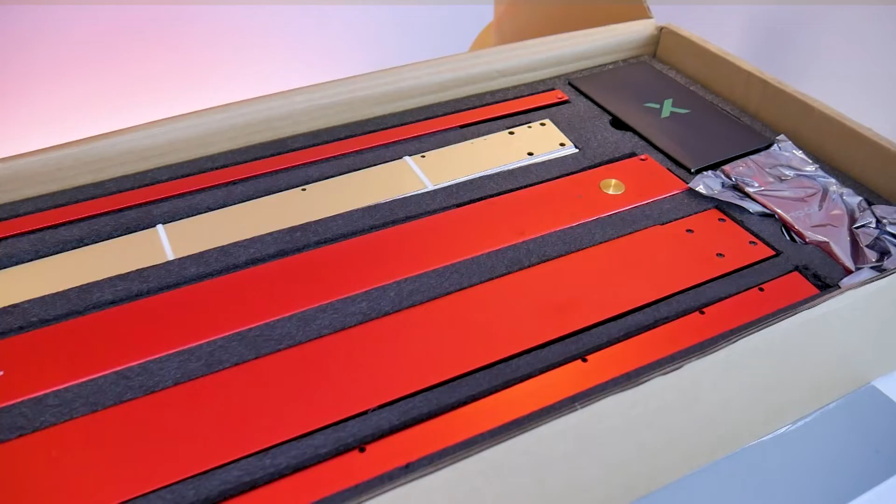Once you pull back that top layer of foam, you reveal these beautifully anodized frame components. Now, I'm definitely a sucker for anodized aluminum, and when I saw this kit in red, it just blew me away. It's absolutely gorgeous. Having worked with a lot of cheap 3D printers and cheap laser cutters, I've definitely gotten used to the very inexpensive aluminum extrusion construction of most of those machines.

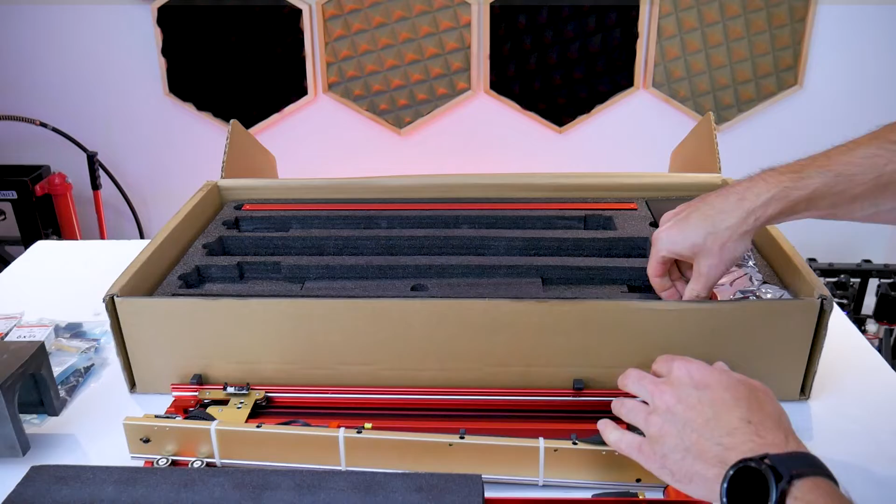I thought it was really nice to see that XTOOL took a different approach with their own custom profiles, and they didn't go for the typical plastic V-wheels on the aforementioned aluminum extrusion. All of the components look and feel really high-end, even down to the safety glasses, which come in a nice hard shell case. I was sent the 10-watt kit, so you just saw me pull out the 10-watt laser module. There's a few other frame components left in the unboxing here, the power supply, and finally a few odds and ends.

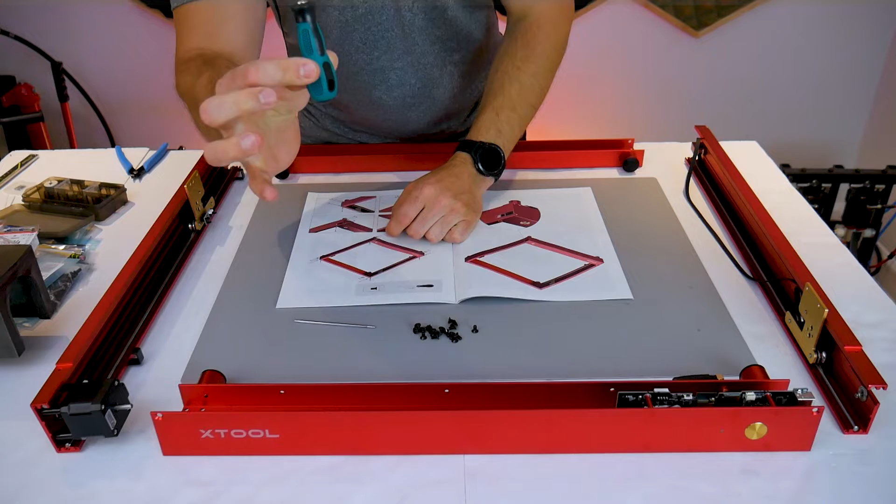Now we can get to the assembly, and although the included instruction manual is pretty good, there are a few small details missing that I'll walk you guys through. And so you can see I've laid out the frame components, and I'm going to be using the included screwdriver along with the M4x16 flathead screws to begin assembling these frame components into a simple box configuration.

Each corner of the frame gets 4 of these M4x16 flathead screws, and I simply just start with the one on top so that I can get all of the corners aligned, and then I'll put in the other 3 screws at each of the 4 corners. When you're finished, each of those 4 corners will look like this with 4 of those flathead screws.

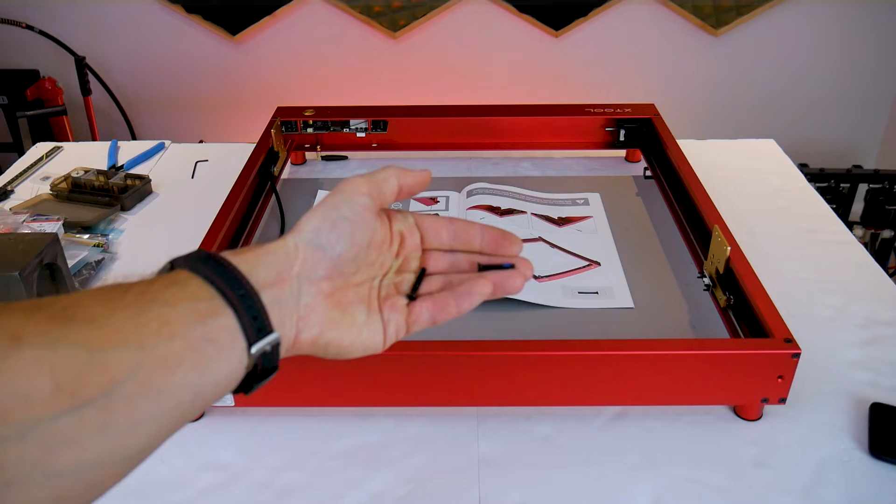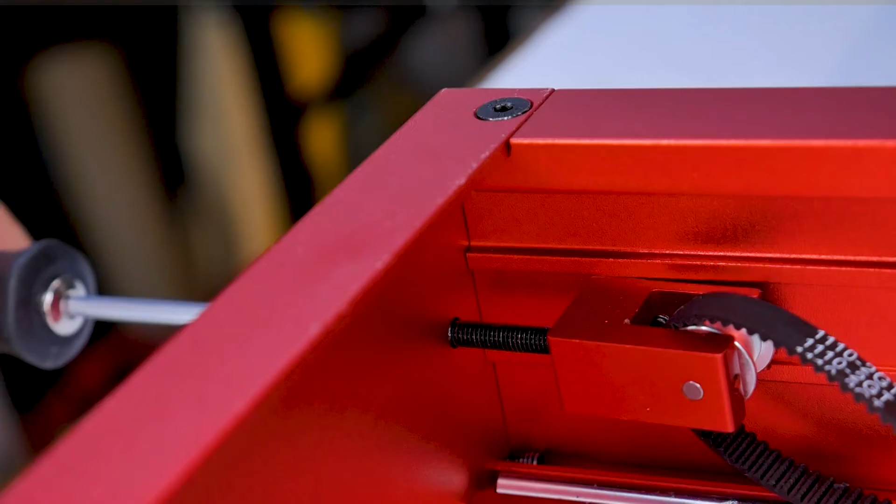Then you'll take 2 of the M4x25 flathead screws, and those will be inserted through the back of the frame, so you can see that I've flipped the machine around, and those will thread into the tensioners for the belts. On one side of the machine, you'll notice that the tensioner is loose, and on the other side of the machine, you'll see that the tensioner and the belt has come pre-tensioned.

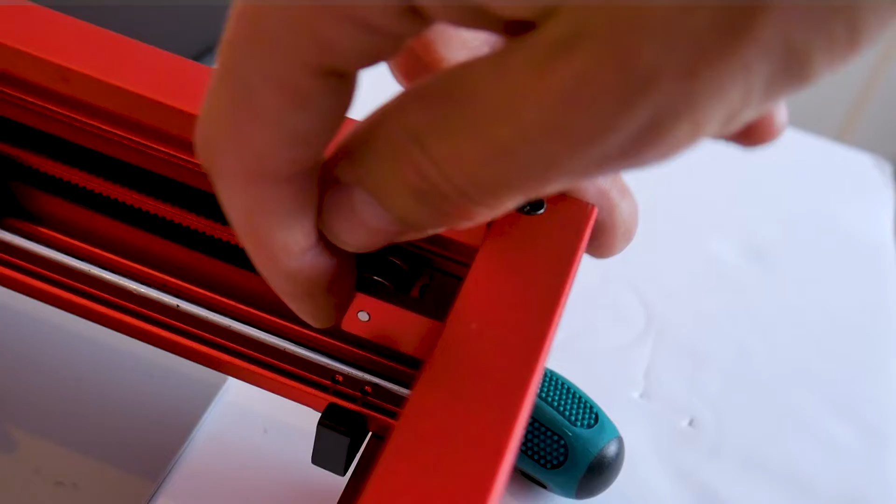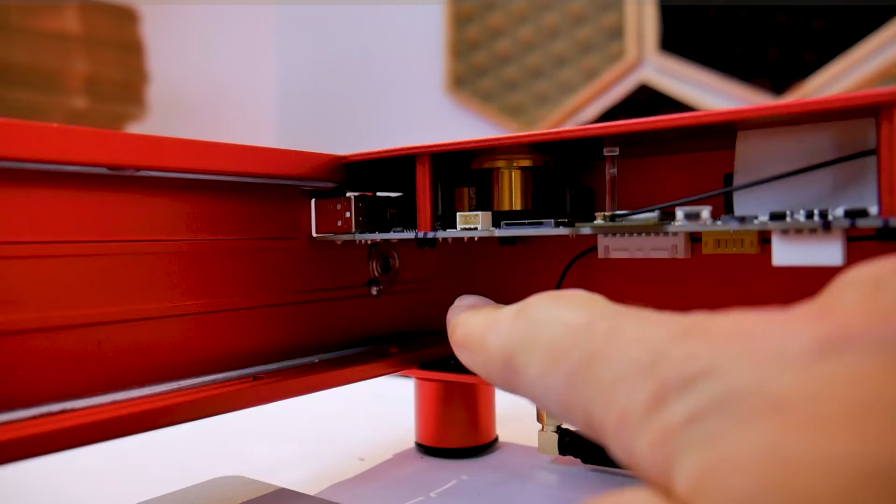Next, we'll install the Y-axis pulley shaft, and the one end of the shaft has the tooth pulley pre-installed, and the other end of the shaft is going to need this split collar. The split section of the collar has 2 unequal length sides, but I'm pretty sure it won't matter which side you align with the motor and the other side with the shaft. The rod will get installed inside of the front frame member, and on the one side under the control board you can see a bearing, and on the other side that is where the Y-axis stepper motor resides.

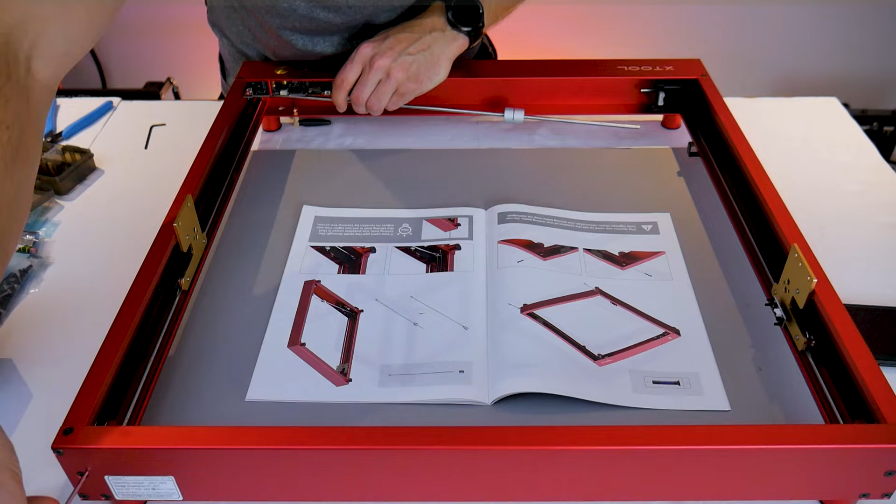You'll need to untangle the untensioned belt until that carriage moves smoothly, and then you can wrap the belt around the tooth section of the pulley and insert the exposed end of the shaft into that bearing underneath the control board. If the belt is too tight, reach around to the back of the machine and loosen off the tensioner. Then you can align the pulley shaft with the stepper motor shaft and slide the collar down so it covers both of them. Do not tighten the screws on the collar just yet, and that's because we need to align the 2 Y-axis carriages.

Now, the instruction manual tells you to move the 2 carriages to the front of the machine to get them aligned and bottom them out on the front frame member. Now, on the left-hand side, it will bottom out, but on the right-hand side, what I found is that the carriage will not bottom out. It actually touches a part of this PCB first. That means that your gantry would be skewed if you did it this way. So instead, we're going to move the 2 to the rear of the machine.

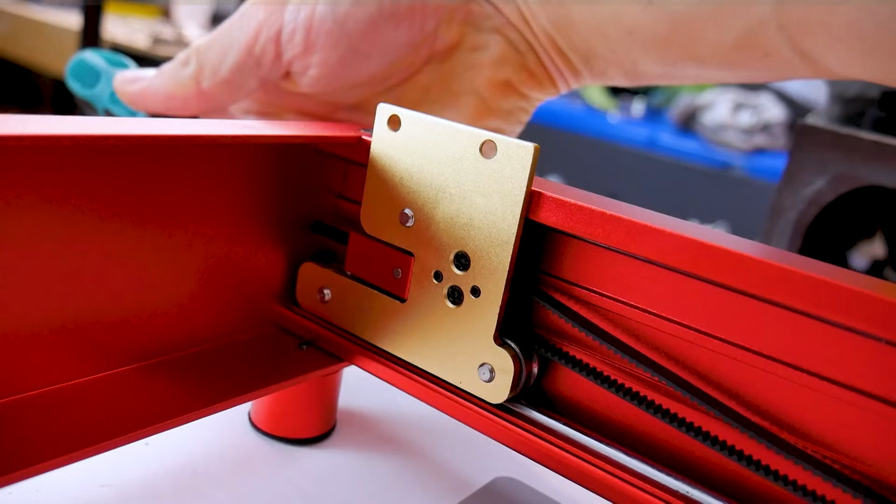And so here you can see that I'm going to get these 2 gold-colored carriages touching the back frame member. On the side with the untensioned belt, you may have to play around a little bit with the belt tensioner to get that carriage to completely bottom out on the back of the frame. Next, make sure the pulley and the shaft are pushed all the way over to the side of the machine with the bearing, and that's going to make sure your belt is aligned.

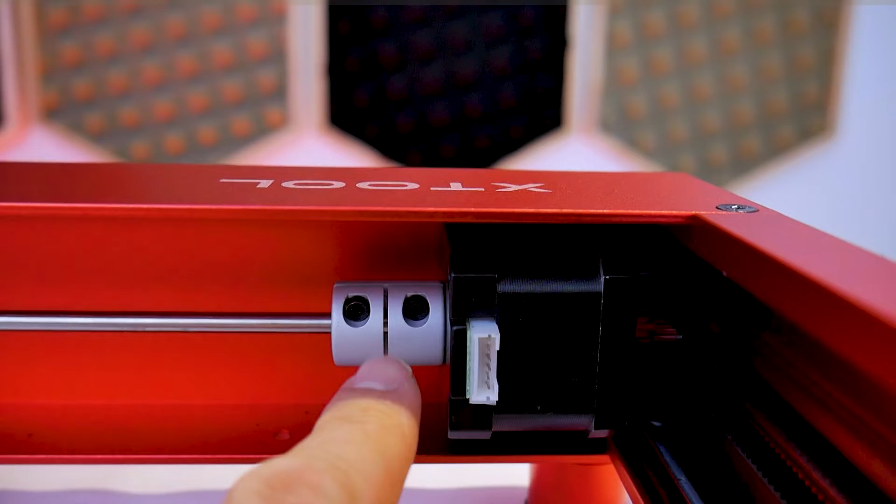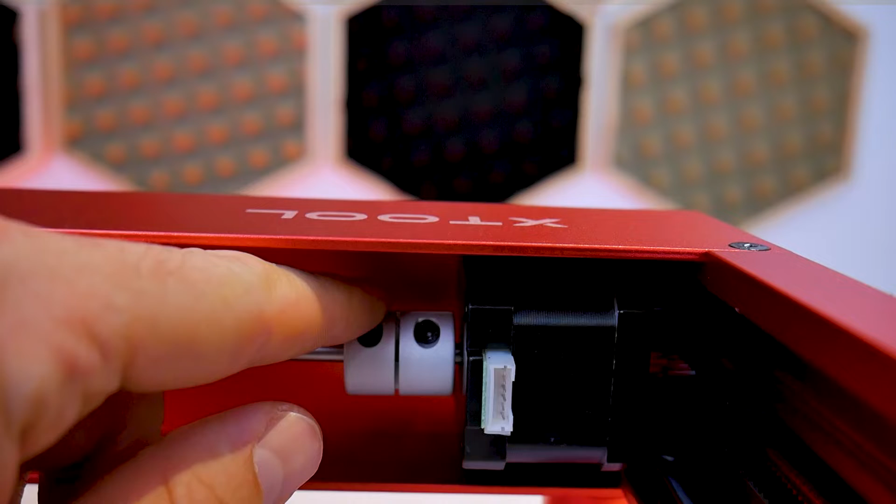And now we're going to take a look at this split collar a little closer. Now this is a very small detail, but I do feel it's important to do this correctly so that it prevents any future slipping between the stepper motor shaft and the pulley shaft. And so you can see when I move the collar back and forth, if you look very closely into that split section, you'll find that there is a point where the split section aligns with the gap between the pulley shaft and the stepper motor shaft. This is where you want this collar positioned when you go to tighten down those screws, and that's just going to ensure that both the shaft of the stepper motor and the pulley shaft are properly clamped down.

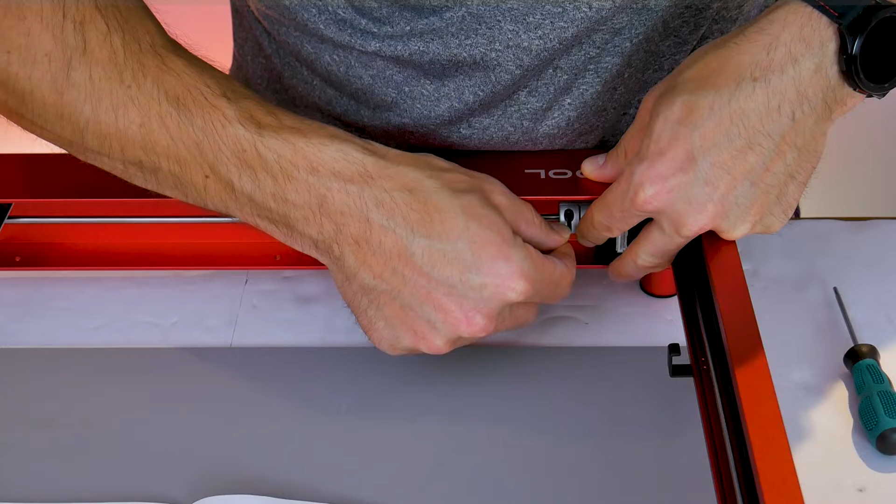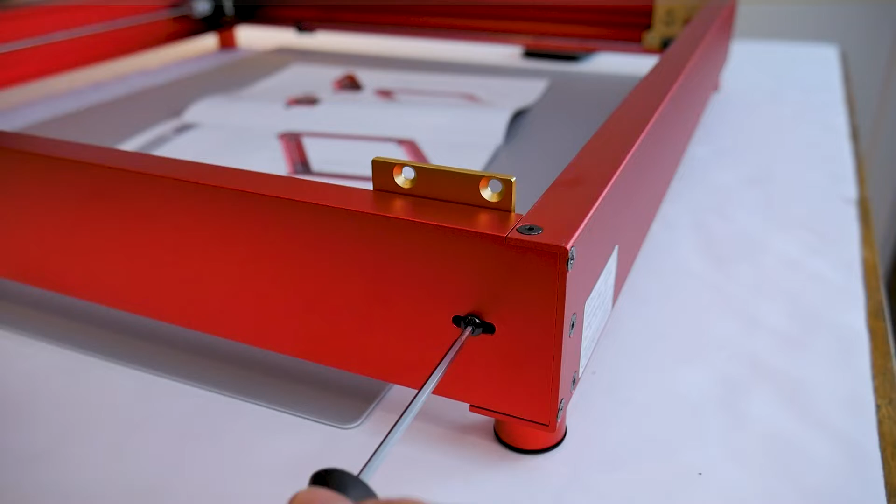Double check that the left and right hand side carriages are still bottomed out on the back of the frame and that they haven't moved, and then return to the collar and tighten the 2 screws down on the collar to lock the position of the 2 carriages in place relative to one another so that they are now synchronized in the exact same position. This will ensure your gantry, when you go to install it, is now square with the frame of the machine and it's not skewed. Now you can double check the tension on the belts and use these screws on the side of the machine to lock the tensioners in place so that they do not loosen off with any vibrations.

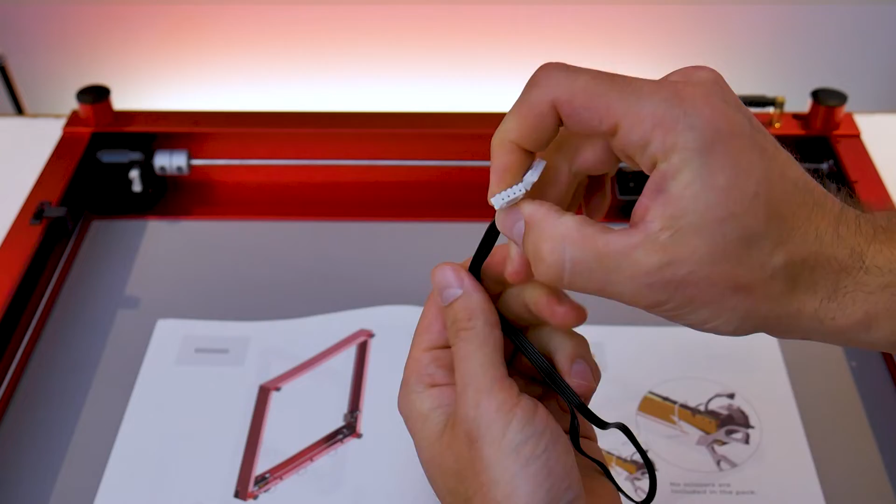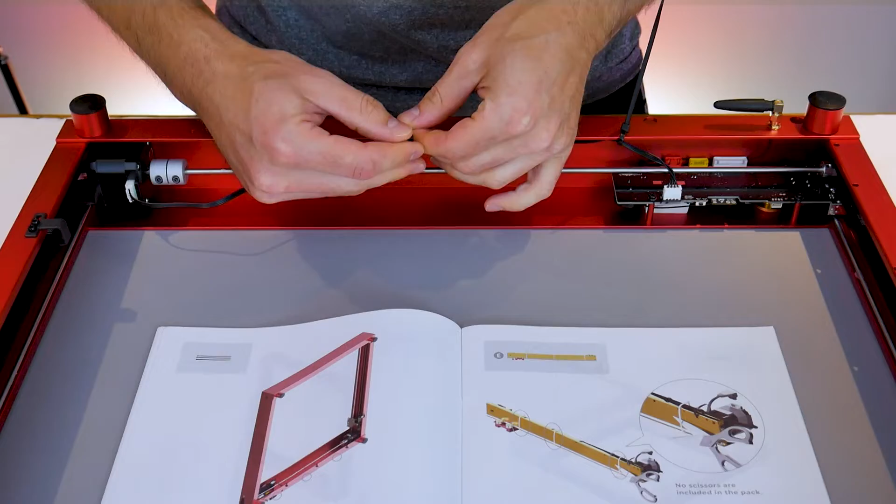Next, you can install the Y-axis stepper motor cable, and just take note that the 2 ends of the cable are different. One end will plug into the control board and the other end will plug into the Y-axis stepper motor. There are holes in the bottom of the front frame member intended for zip ties, so you can just tie that little cable up and out of the way.

The gantry assembly is next, and what you want to do is use some side cutters to free up all the cables from the white zip ties, but at this point do not cut any of the black zip ties. Take a look over on the stepper motor side and there should be a cable and connector tucked into the belt, and that can get plugged directly into the X-axis stepper motor.

Now take the entire gantry assembly, push the cables aside, and line up the 2 ends of the gantry with your Y-axis carriages. There are 4 M4x16 flathead screws that will be used to secure the gantry to those Y carriage brackets. Tighten down all 4 of those screws, and then on the left hand side of the machine on that carriage, there is a space for another flathead screw. You will use one M4x25 flathead screw, and that is going to be responsible for the belt tensioner for the X-axis.

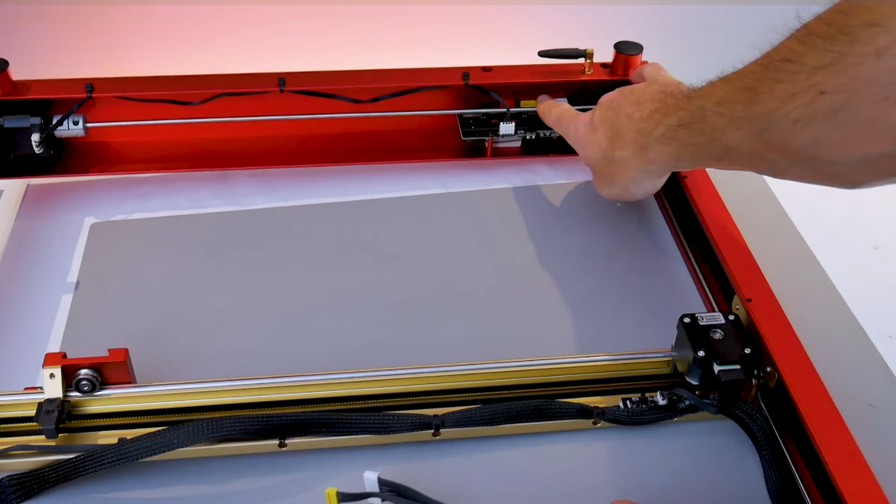In your kit, you'll find a small jumper cable, and that's going to go between these 2 limit switches, one for the X-axis and one for the Y-axis, and you'll see here that I have the machine flipped upside down to better access these plugs. And while we have the machine upside down, it's a good time to make these other color-coded connections to the main control board. So these connectors here are coming off of the gantry, and there's a red, yellow, and white, and as I said, they're color-coded to connectors on the main board, so it's pretty easy to figure out where those will go to.

The instruction manual and other YouTube tutorials I've seen tell you to tie up the X gantry cables using the holes in the side frame member. The problem with doing it this way is that when the X gantry moves, these cables will flex and they'll end up encroaching on the workspace, and inevitably they're going to run into your workpiece. I have a better solution, so this is going to be temporary to get these wires out of the way while we complete the rest of the mechanical build, and then we're going to get a little deeper into the wire management to improve things.

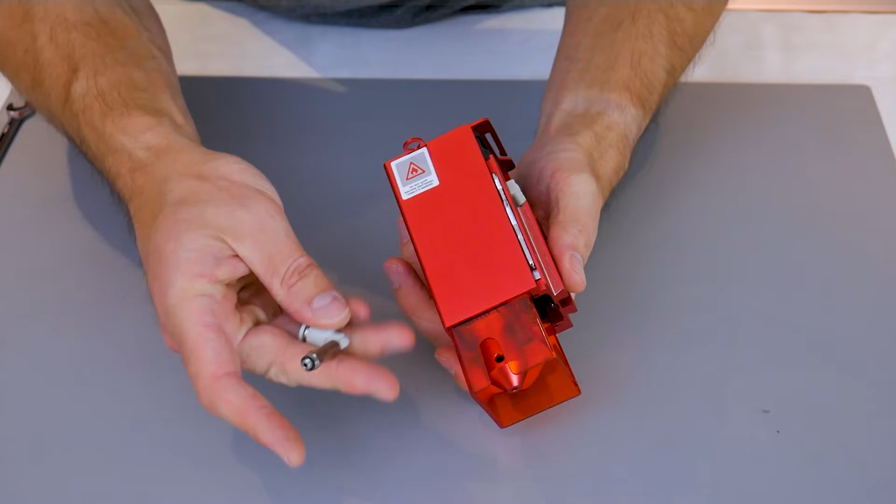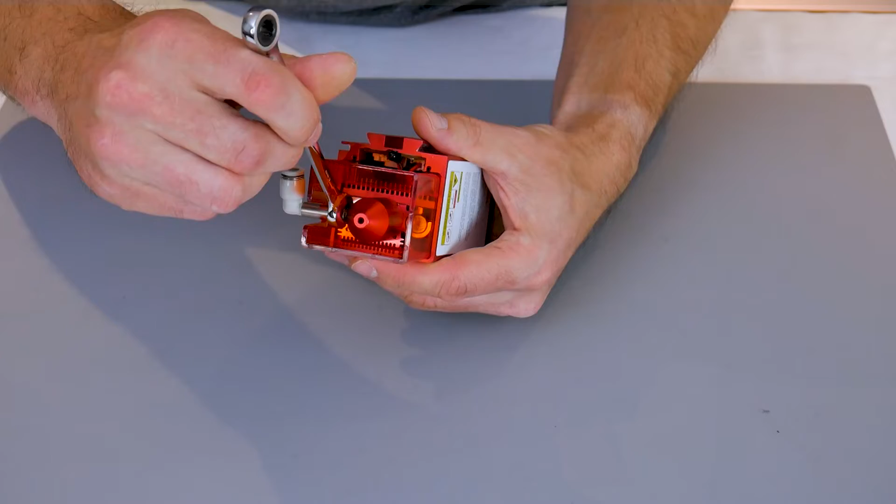And so one of the last pieces of the mechanical puzzle is the laser head module itself, and this is the 10-watt model. So what I'm going to do here is insert and install the air assist fitting. It should just screw into place, and then I'm going to be using, I believe this is an 8mm wrench, to lightly tighten it down.

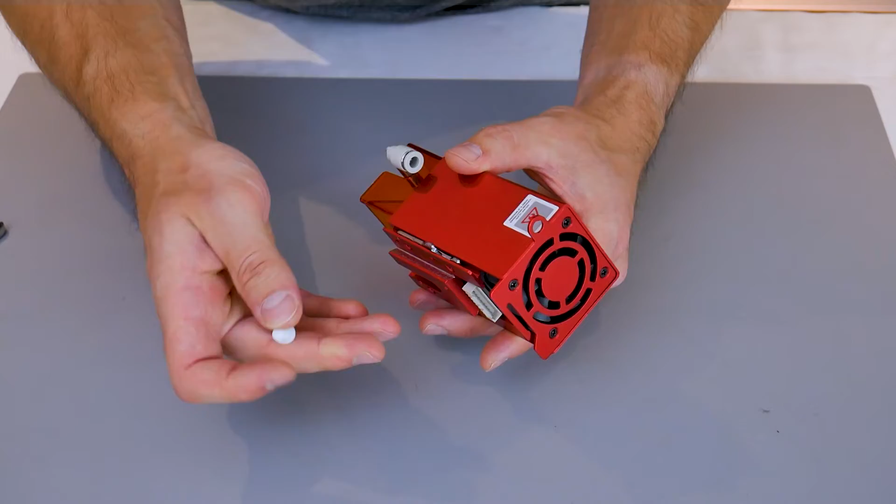Don't go overboard here, you're just tightening this thing into aluminum, and the fitting is a swivel fitting, so you can just swivel it towards the top. And although I'm not going to be using an air assist on this machine, I'm putting this into place and showing you guys how to install it.

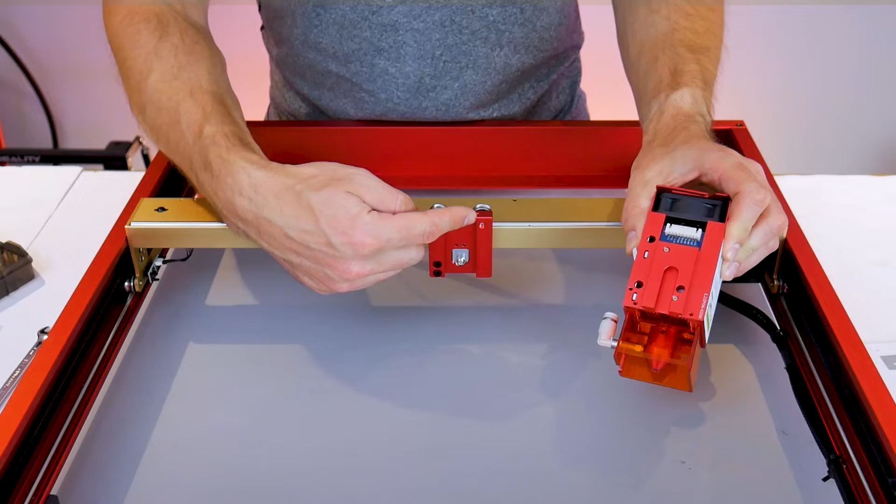The laser module installs onto the carriage using this dovetail style joint, and you might find that the retaining screw is a little too loose or perhaps a little too tight depending on how it was installed at the factory. Due to clearance issues, you can't continuously just rotate the screw around to adjust it. You have to rotate it a little bit and then pull out on this spring-loaded thumb screw style adapter piece. The thumb screw piece can then be repositioned, popped back into place, and then you can do another partial rotation.

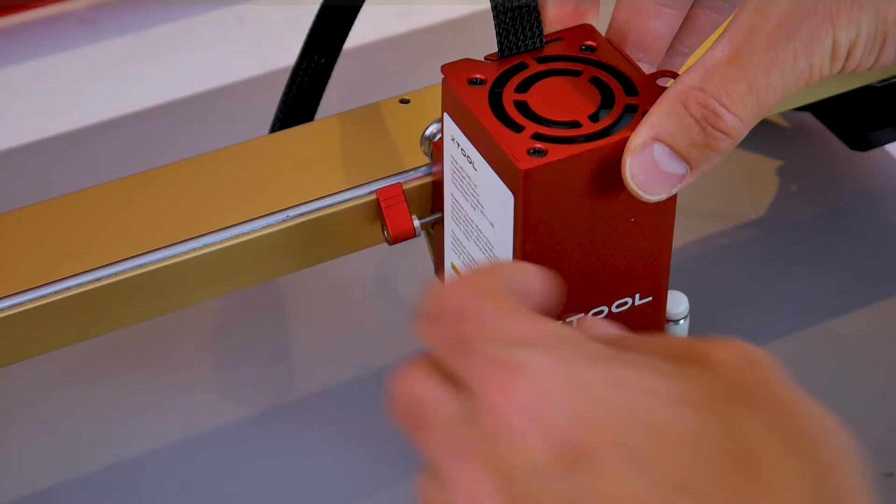You might have to do this several times before being able to get the laser head module to slide down into place. In my case, the screw was too tight, so I had to loosen it off a whole bunch of times before I could get the laser module to slide all the way down. Then I had to work in the opposite direction where I had to make adjustments so that it was slightly tighter and find that next sweet spot where the thumb screw adapter at the top would allow me to move the laser head module around, and then when it was rotated down to the bottom, it was tight enough that the module would not move around.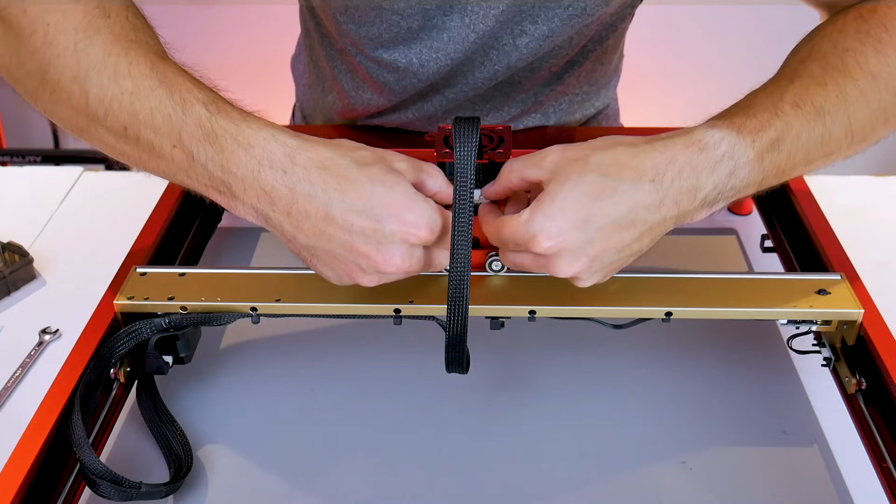Once that was done, I was able to grab the last connector off the back of the gantry and install it into the back of the laser head and also through the strain relief at the back of that module. Now we're almost done, and so one of the final things to do here is insert the SD card, and now we can circle back to the wire management. We're going to spend some extra time on the wire management and address some of the issues that I've identified.

The first one is with this little trigger mechanism for the optical sensors on the X carriage. With the cables in place as they were installed from the factory, when you move the X carriage back and forth, oftentimes that little trigger mechanism will catch those cables and start to drag them. Then the X carriage will bind. To fix this, we need to reposition these cables, and so you're going to remove those black zip ties all across the bottom of the X gantry.

The cables should be repositioned from the bottom of the gantry to the back edge of the gantry. You'll also notice that I've repositioned the ratcheting part of the zip tie to that back edge, and that's going to get everything up and out of the way of that trigger mechanism for the optical sensors. Run the carriage back and forth by hand and make sure that you don't have any interference and it's not catching any of the cables.

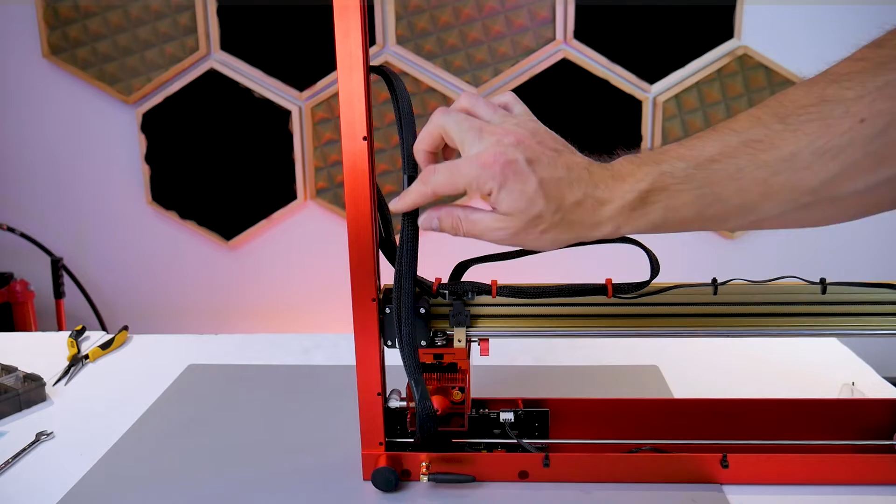Now I've cut off the zip ties that were holding the cable set going back to the main board through those holes in the side frame rail. The original positioning of this cable will cause the looped end to bend towards the middle of your work area as the X gantry moves back and forth. The cable could then come in contact with your workpiece and potentially shift it around. Now, I'm not the first person to identify this issue. I've seen it in other YouTube videos.

Some people have solved the problem with things like cable chains, but I have a much simpler, much faster, and lower cost solution, and we're going to be fixing the cable to the bottom of the frame member rather than the side. And we're going to be using these small adhesive cable clips. In order for them to properly stick, you're just going to grab some isopropyl alcohol and clean the bottom surface of this frame member. Then you can remove the adhesive backing and stick about 4 or 5 of them down on the bottom of the frame member. Do not put any past that last hole that was originally used for the zip ties.

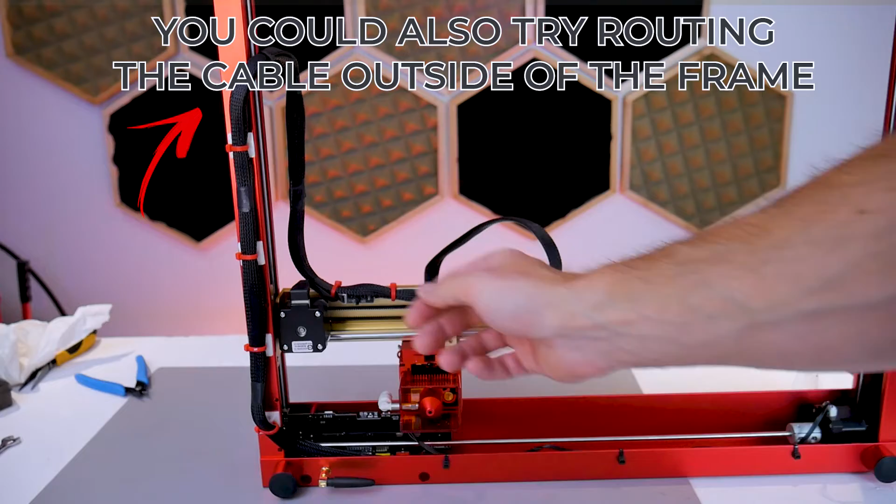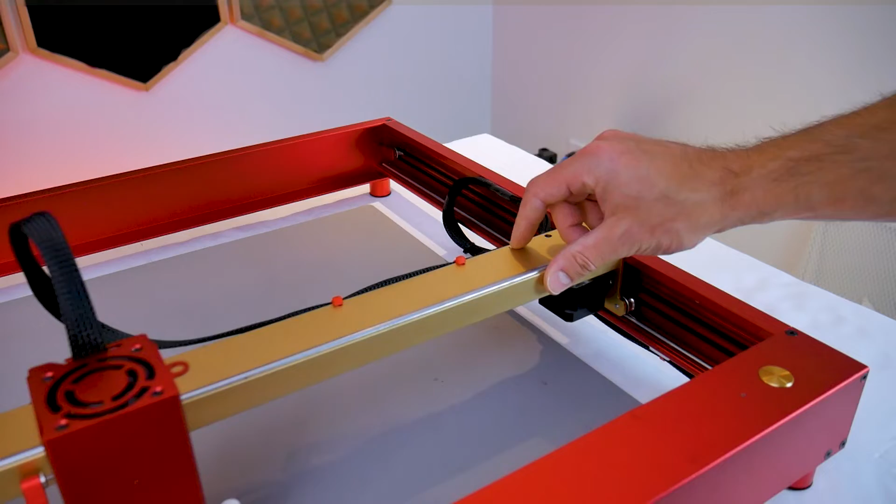Zip ties just loop through these clips and secure the cable to the bottom rather than the inside edge of that frame member. This minor change to the cable position completely changes the way that the cable behaves when it bends, and it stays completely out of your workspace. And the last issue that I found was that when you try to move the gantry to the very back position, sometimes that cable loop will get pinched between the gantry and the rear frame member.

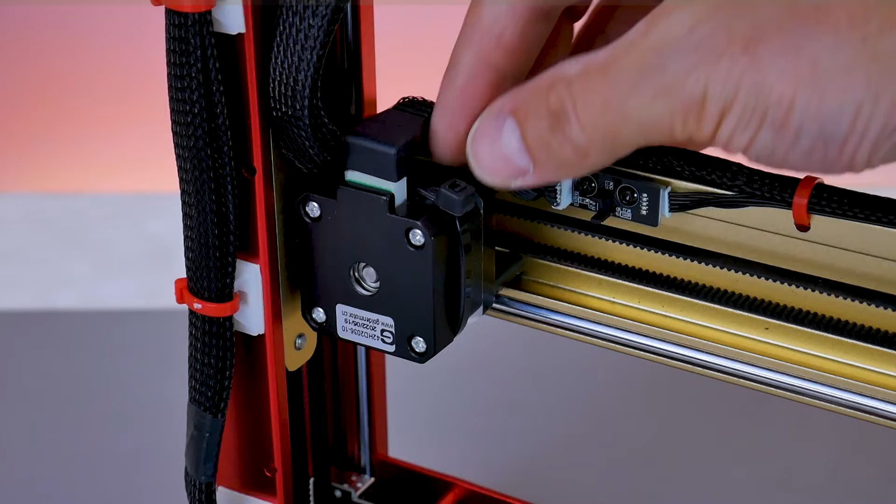This can cause an unpredictable and slightly erratic movement of the gantry, and so to fix that, it's actually pretty simple. You can take one zip tie and secure the gantry wiring harness to the stepper motor. To do this, you're going to want to remove the plug from the stepper motor, and then it's much easier to wrap that zip tie around and get the cable flat against the stepper motor,

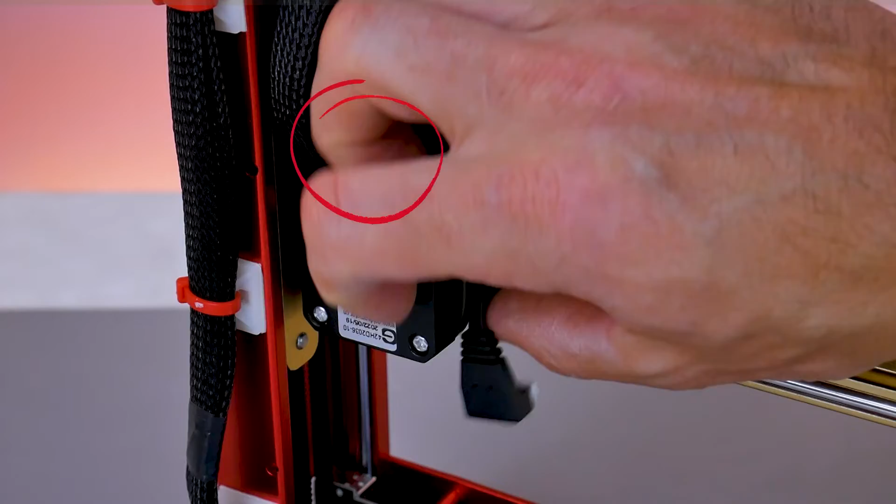and then you can plug the connector back in. When the gantry moves back and forth, the wiring harness will still bend with a nice generous radius in the loop, and at the very back of the gantry movement, you will no longer have that impingement between the gantry wiring harness and the back of the frame. If you watch carefully in this clip here, you can see that the movement is now smooth, and we've solved the issue without having to resort to expensive and complicated cable chains.

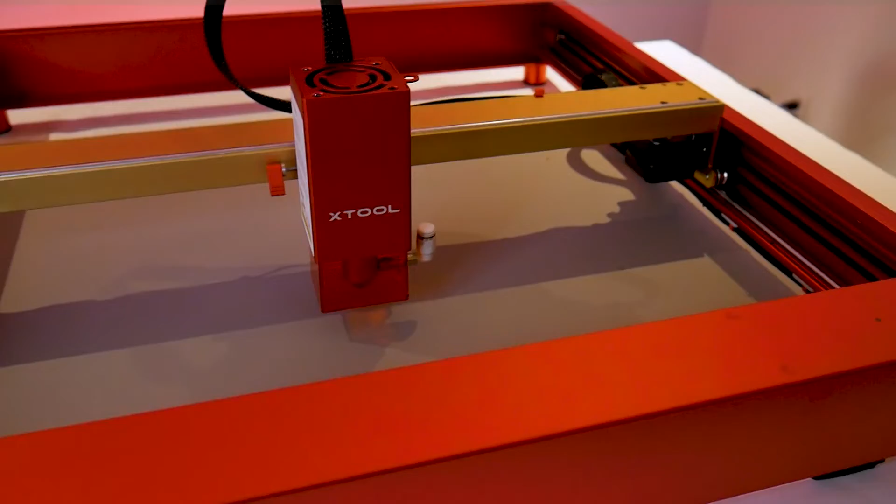That wraps up the assembly portion of the XTOOL D1 Pro, so take a moment to admire its beauty, because it's not often that you can actually describe a tool as beautiful, at least not from my experience. The red and gold is extremely striking, but keep in mind that this kit also comes in a gunmetal gray if you're a person who wants something a little more muted.

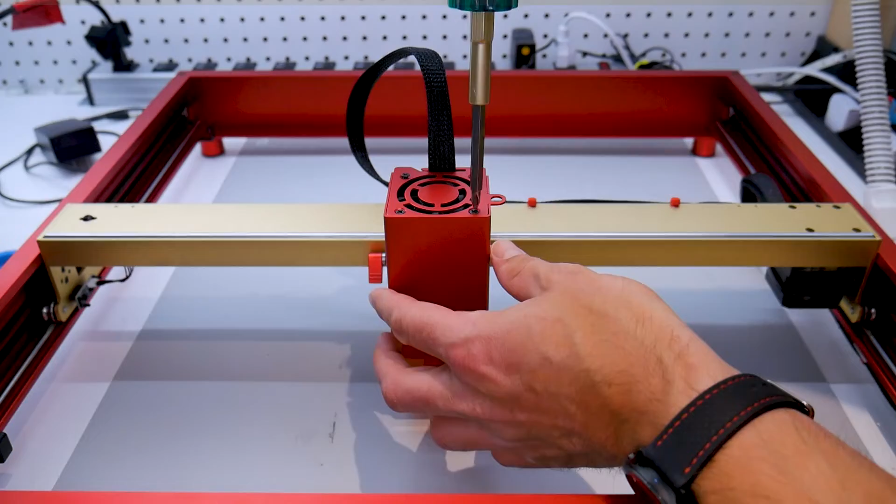If you've watched some of my other videos, you know that it doesn't take me very long before I start modifying my tools, and the D1 Pro is no different. I recently tested out another open frame laser cutter, and like everyone else who's ever used one, you come to realize that you need to find a way to manage the smoke and the fumes. So before even making any cuts, I got to work designing a new fume extractor for the D1 Pro.

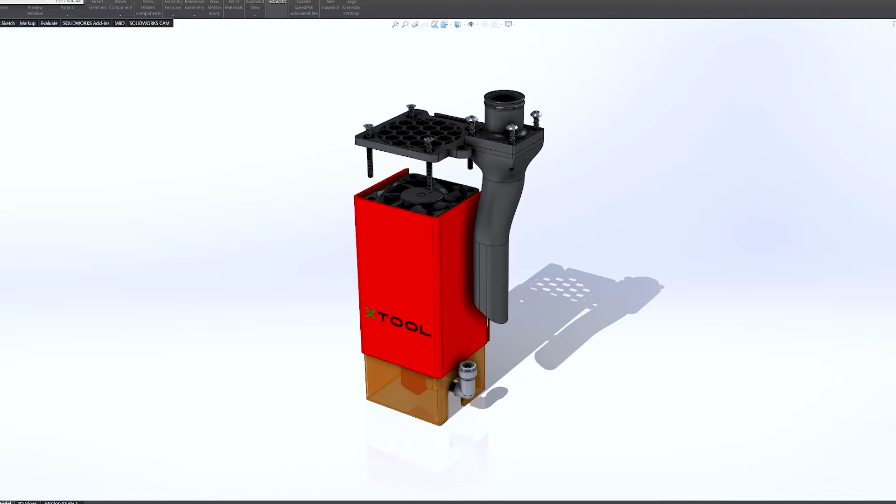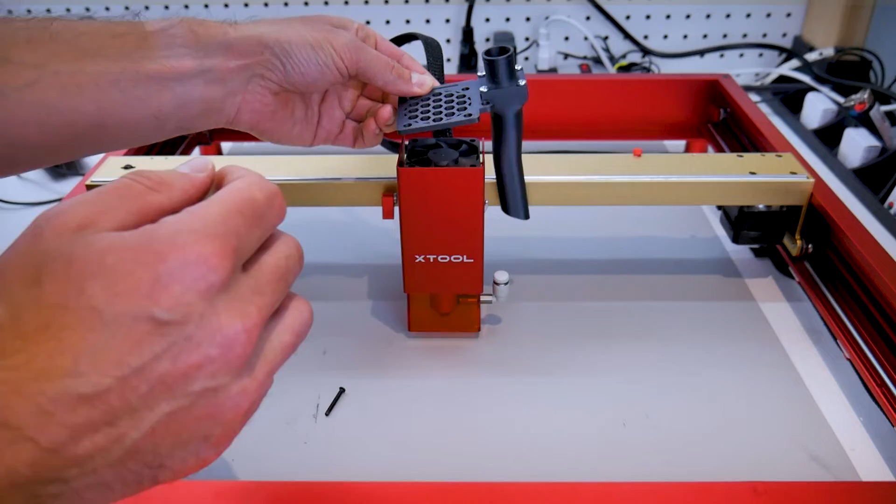Now I'm not sure if this will fit the 20 watt module because I don't have one. This is the 10 watt module, and to install it, you can start by removing the fan guard at the top of the laser module. The 4 screws get removed and this whole piece gets replaced with a new fume extractor. The original hardware will be reused to secure the new piece in place, and this new fume extractor nozzle will extend down and beside the air assist fitting. It will not interfere with the air assist hose or fitting if you're running one.

The concept here is to suck up the fumes and smoke right at the source, and this way you don't need a large filtration system where you're exchanging all of the air either inside of an enclosure or your entire room. In a previous video, I built a light-duty fume filtration system using a shop vac and some other inexpensive parts. I'll put a link to that in the top right-hand corner of the screen, and this should work very well with this setup here.

The hose adapter at the top of this extraction nozzle is intended for a CPAP hose.

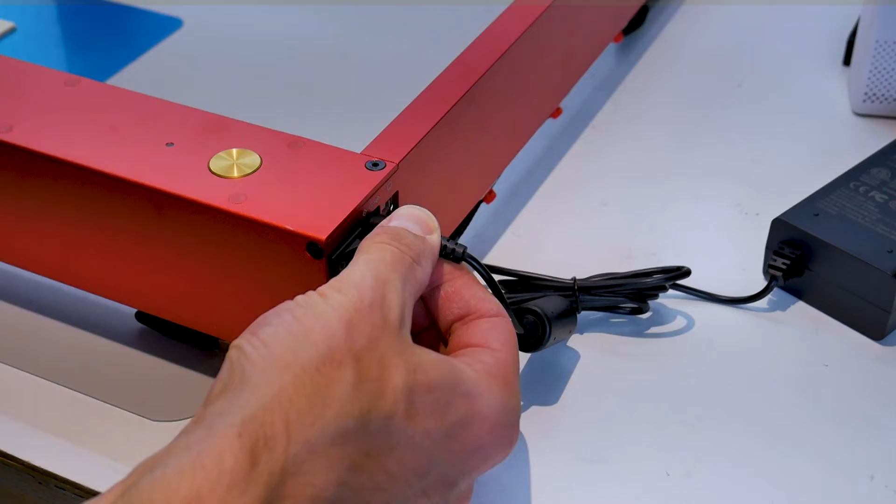In order to make our first cuts, we need to get this thing up and running. So you're going to need to plug in the power connector as well as the USB cable, and then switch the power switch on, and the LED on the top of the unit should turn on. You should also notice the crosshairs on the laser module turn on. The other end of the USB cable will get plugged into your computer, and you're going to need to download the XTOOL Creative Space software.

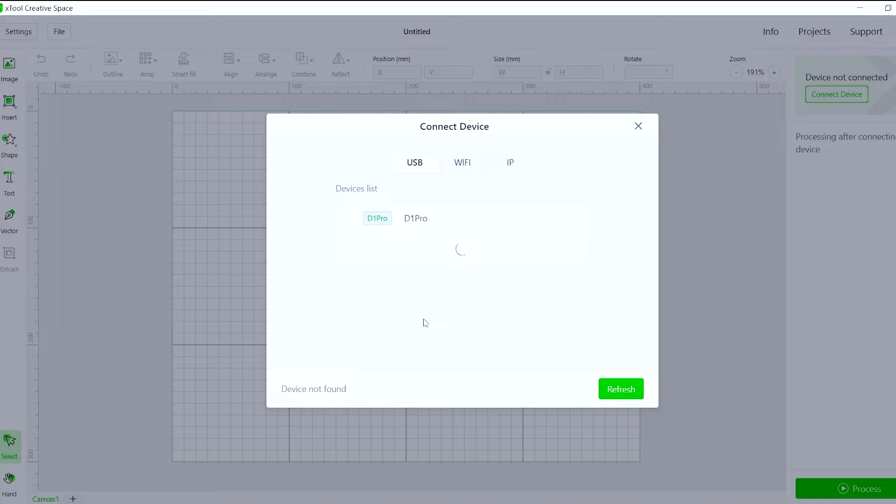When you plug the D1 Pro into your computer, you will notice that some of the drivers automatically installed. However, when I launched the software, I did get this message that more drivers need to be installed, so I hit yes and installed those. On the top right hand corner of the screen, you can just click on Connect a Device, click on the D1 Pro, and if this is the first time turning it on, you'll likely have to update the firmware.

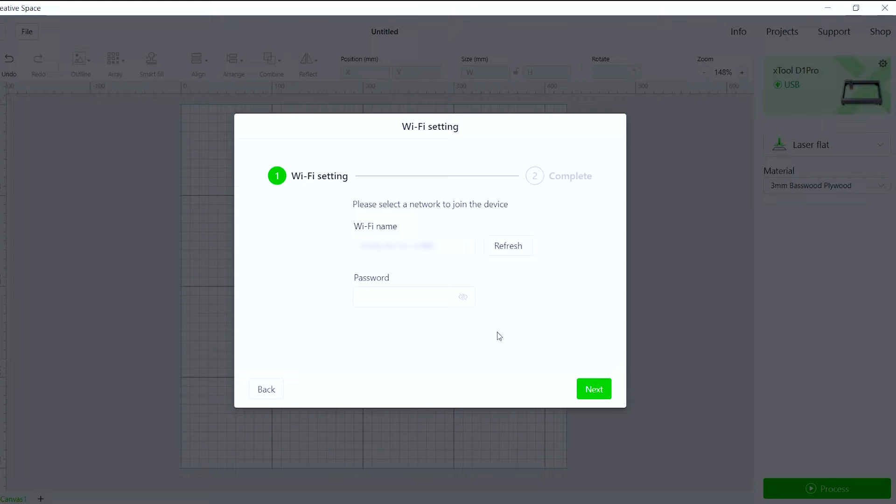Make sure the small dip switch on the side of the control board is in the correct position for a firmware update, and the XTOOL Creative Space software will take care of the rest. After the firmware update, don't forget to flip the dip switch back, and then in the top right hand corner of the screen, you can dive into the settings and we can set up the Wi-Fi connection.

So you can do this as an alternative to connect to the laser cutter instead of using the USB cable. With the Wi-Fi SSID and password set, you can now unplug your USB cable. The software will automatically disconnect. You can go back up to Connect Device, head to the Wi-Fi tab, and then you can find your machine in the Wi-Fi tab. Once you click connect, you should see that your machine is now successfully connected through Wi-Fi.

So it's important to note here that the XTOOL machine is compatible with the very popular Lightburn software, but I don't have a license for that. And considering this is an XTOOL product, we might as well see how their machine works with the native software. It has quite a few features, and I could likely do an entire video on XTOOL Creative Space all on its own. So really what I want to do here is just get right into the fundamentals of the software so you guys can get working right away.

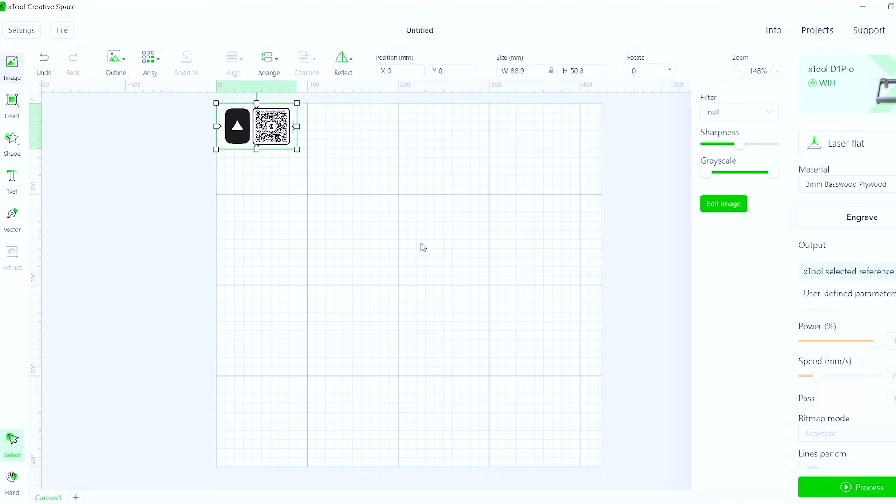And the first thing you need to understand here is that at the time of the making of this video, the XTOOL software does not support absolute coordinates. So what you're looking at is the usable space of your laser cutter. Therefore, when I click on the image button on the left-hand side of the screen and I import an image that we're going to engrave onto some wood, I can position this image anywhere within this usable workspace, but the position of the image within this workspace is not representative of where the tool head is going to move to engrave that pattern.

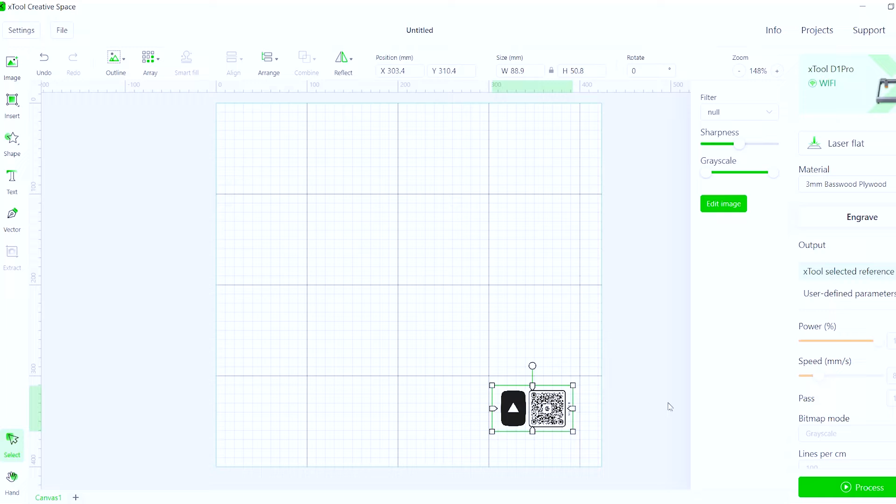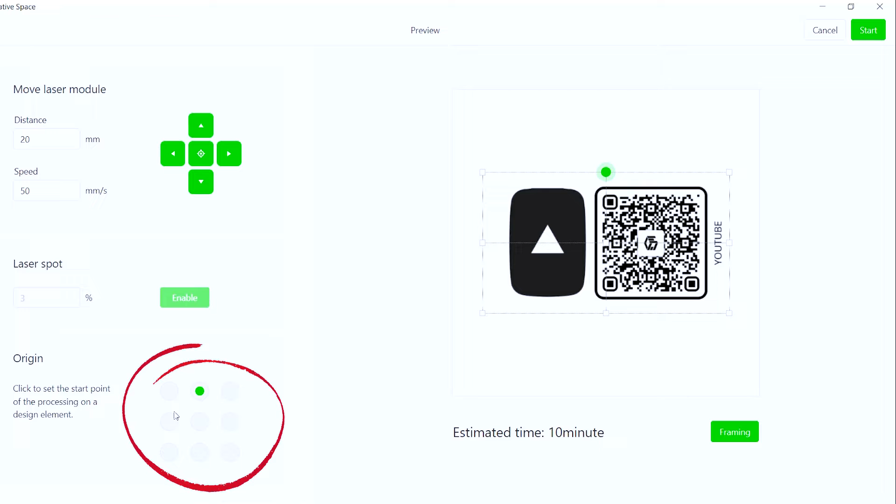And so for instance, I can move this image to the bottom right-hand corner of this grid, and then when I click the process button, you'll see here that all that shows up is the image itself, and there's a small green dot in the top center of this image, and this represents the 0 position or the origin position of the tool head with respect to just this image. Now I can change that origin position by clicking these buttons over here, and I can move that to the center, top right-hand corner, it doesn't matter. That's just going to help me align the start position of my laser module with respect to my workpiece.

Now I like using the bottom left-hand corner of my workpiece as my origin position, and as you'll see in this next clip, when I go to start and process the job, I actually have the workpiece positioned right in the center of my machine. And so even though that image, as I had said before, was set up in the bottom right-hand corner of that grid within XTOOL Creative Space, my workpiece is right in the middle. Again, we are not using absolute coordinates.

This is all relative. I'm hoping that in future versions of the software, absolute positioning is supported because the D1 Pro does come with limit switches. So in theory, the machine could know its origin position with respect to its machine limits because it can home itself to those limit switches. This would make repositioning the tool head very easy, convenient, and highly repeatable. And so XTOOL, if you're listening, please make this available in future versions of the Creative Space software.

Now, while this job is processing, I want to point out a few things. The first thing here is that the fume extraction nozzle that you see in this first job is different than the one that I presented to you guys earlier. That's because this is one of my earlier prototypes, of which I improved the design. The second thing to note here is that I have the aluminum sheet underneath the workpiece. Now I'm not making any through cuts, I'm just engraving right now. I will be making through cuts in a moment, and when I do that, this is going to protect the table underneath.

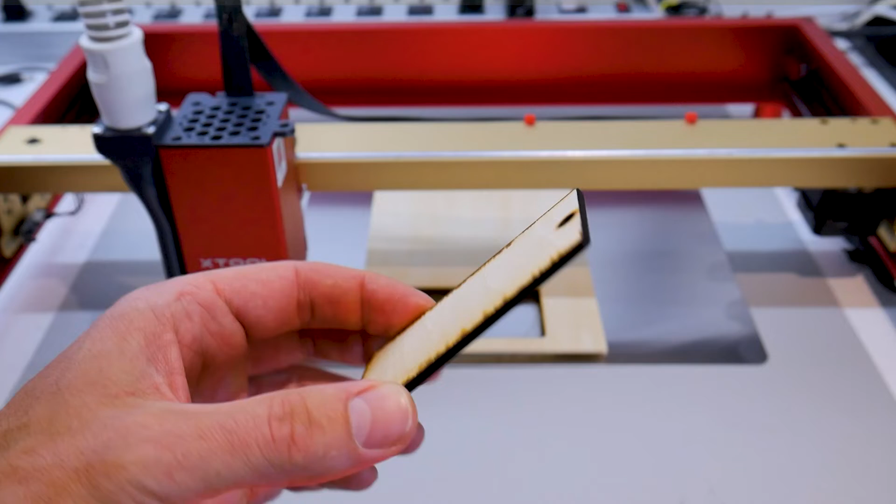With the job done, I can tell right away that I need to fine tune some of my settings, and I just used some of the presets in the xTool Creative Space software for 3mm thick basswood. The presets are always a good starting point, but I can definitely see that the power settings are a little too aggressive, or alternatively I could leave the power settings and I could speed up the tool head movement a little bit. That will likely give me much crisper results for the engraving, and for the through cuts I'll probably have a lot less burning.

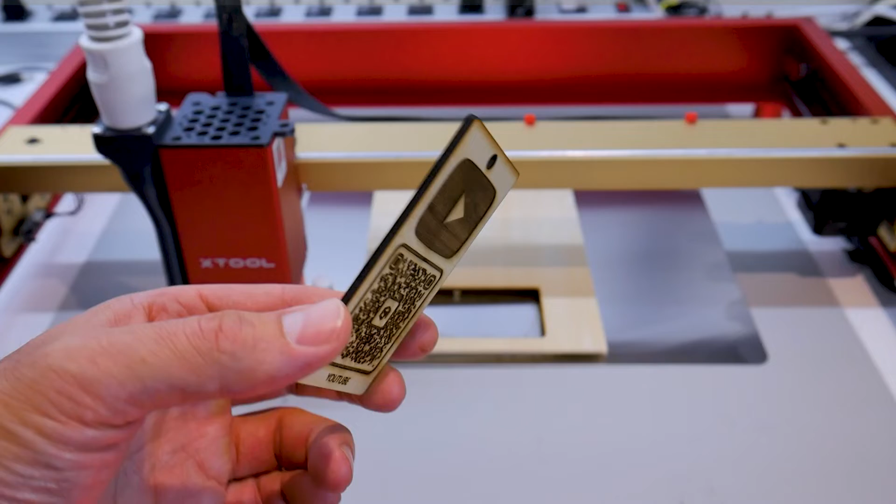However, in this particular case, because I had the material sitting right on top of that aluminum sheet, a lot of the burning that you see along that back face is probably due to some amount of reflection of the laser. And this is where I was saying earlier that it is ideal to have some sort of airspace beneath this piece, and you'd want to use some sort of grid-like material to support the workpiece so the laser can pierce right through and not be reflected back at the bottom surface of your wood.

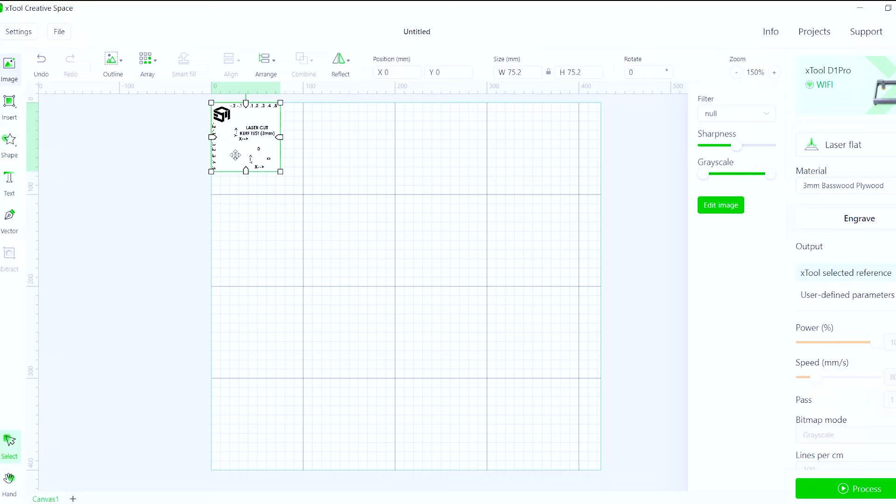Now in this next example, I'll be a little more thorough in walking you through the entire process start to finish of engraving and cutting something. And so I've imported a PNG file here through the image button on the left-hand side of the screen. And this is basically what's known as a rasterized image, and it has no vector components to it. And therefore, when you click on it on the right-hand side of the screen, you'll see that the only option is to engrave. Now there are ways to convert certain parts of the image and create outlines and make vector components out of something like this, but that's outside of the scope of this video. And so right now I'm just going to show you with this rasterized image.

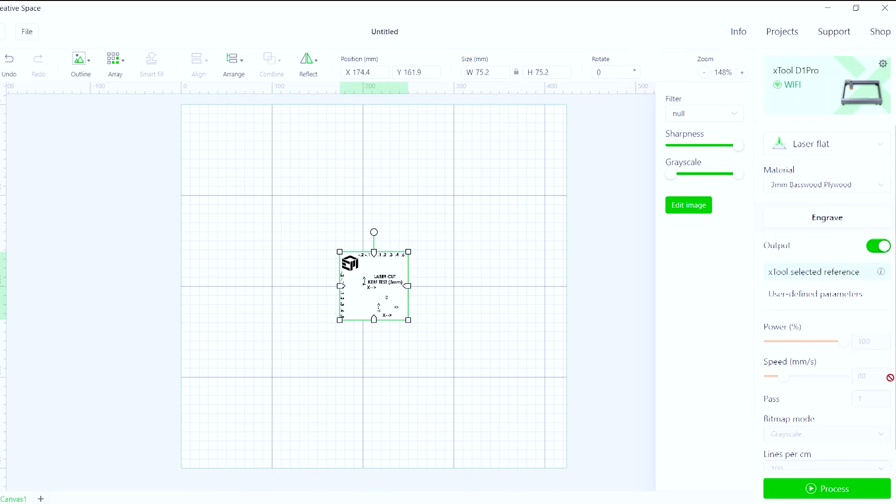You can head on over to the right-hand side of the screen. Like I said, you're just going to be able to engrave. I'm going to select a preset, so I'm going to select the 3mm basswood plywood, and then from there are power and speed settings, but again, those are parts of the presets that are all selected for you. So you can just go down and hit process. I'm going to set my origin to the bottom left-hand corner of this image, and then I'm going to hit the button that says framing. A prompt will appear telling you that the machine is ready for framing, and all you need to do is hit the button on the front of the machine.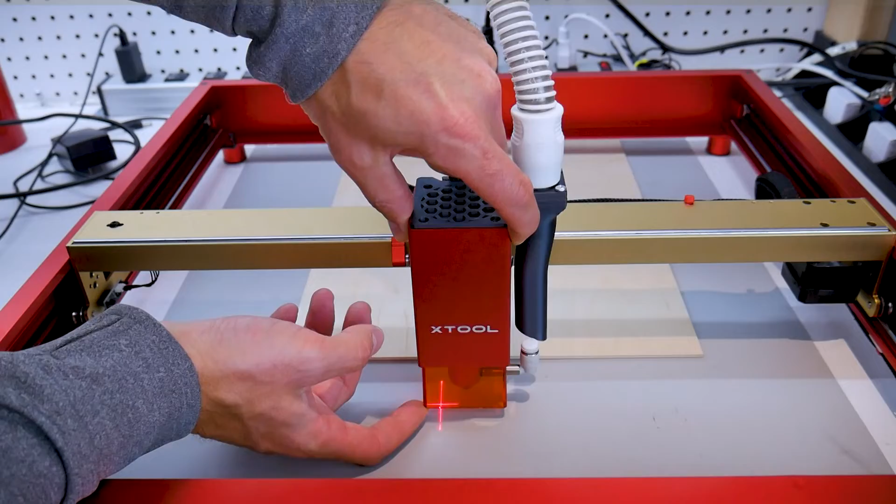Over at the D1 Pro, before doing any framing, I want to make sure the laser is focused, so I have to set the tool head height. I'll flip up the thumb screw retainer on the left-hand side. I'm going to flip down the focus bar on the right-hand side. That focus bar will touch the top of my workpiece, and then I can flip the thumb screw down on the left-hand side, tightening and securing the tool head in place, and then I can flip the focus bar up on the right-hand side, up and out of the way. And now the tool head height or laser focus has been set.

But now we need to set the X and Y position. And so as I discussed before, the machine is not using absolute positioning, it's using relative positioning. And so you'll see that I have the crosshairs set up at the bottom left-hand corner of my workpiece. You'll notice that the crosshairs are offset from the center of the laser, mostly just in the X direction, but the software compensates for this offset automatically and you don't have to do anything about it. Just line up the crosshairs in the bottom left-hand corner of your workpiece and make sure your workpiece is square within the frame. The front button of the machine is outside of the frame of this shot, but I just pressed that button and the machine did the framing.

What this does is it moves the tool head around the outer limits of the file that you're about to process, and this gives you some sort of visual indication of the bounds of the toolpath. This also ensures that you've positioned the workpiece in a place where the toolpath will not exceed the bounds of the machine. And so if it tries to move to a place where it's going to trip a limit switch, the machine will trigger an audible alarm and you'll know that you'll have to reposition your workpiece.

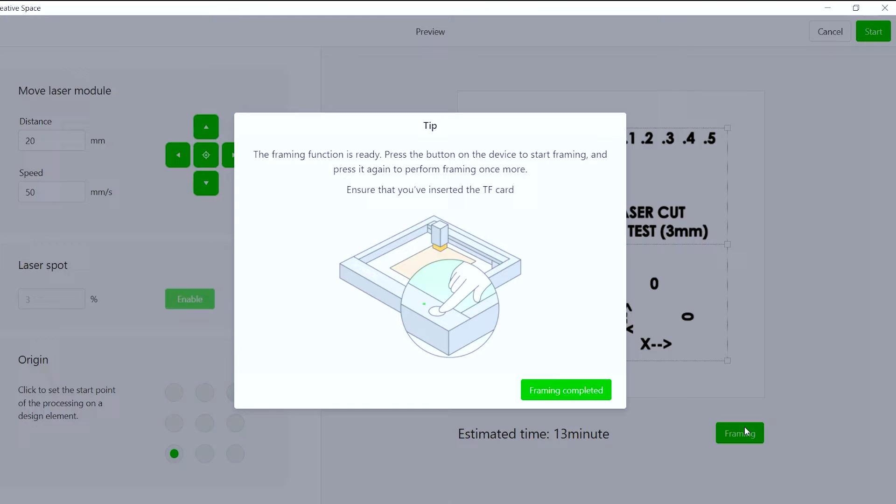In this case, everything looks good, so I can click on framing completed, and then I can go up to the right-hand side of the screen and click start to start the job. A prompt will appear telling you to press the button on the front of the machine to actually start the job. The engraving job will now begin, and I've sped this video clip up about 3 times, so it's not so painful to watch,

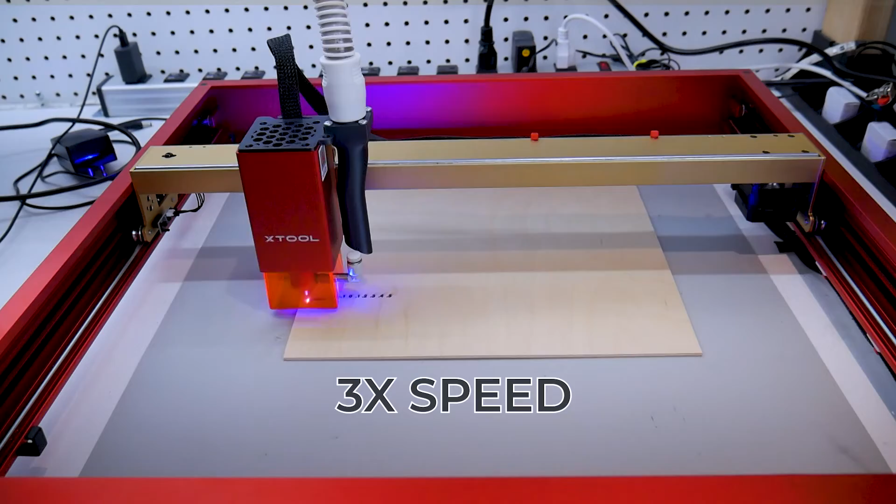but what you'll notice here is that I do have the new vacuum extraction nozzle mounted to the tool head, and it's doing an excellent job of removing all of the smoke and fumes. As you can see, there's no accumulation of smoke in the work area. It's all being extracted right from the source with that nozzle.

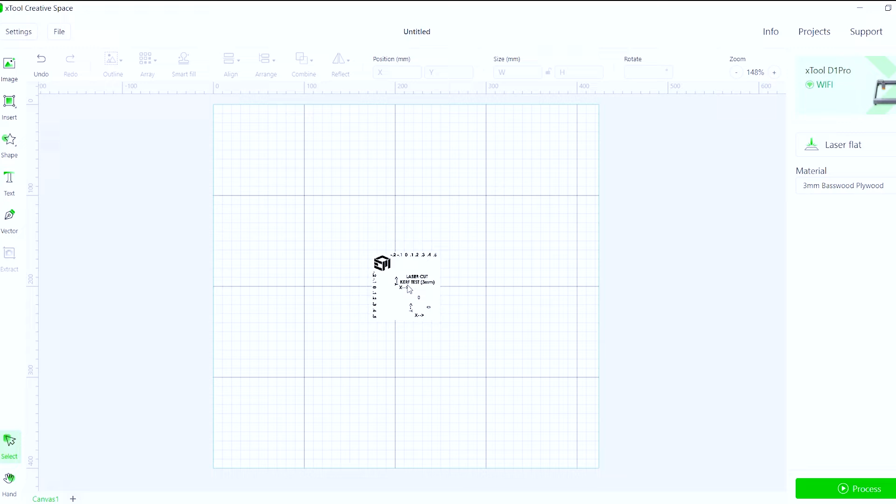When the job is complete, the tool head will return to the origin position and will be ready for the next process, which will be the through cuts. Under normal circumstances, I would have processed the engraving and through cuts all in one shot, but for this demonstration, I thought it would be more clear to separate them. And so you see that I've clicked on the image and I've gone over to the right-hand side and disabled the output. And now the software will ignore that image for the next job, and I'm just going to use it here to help align my through cut file.

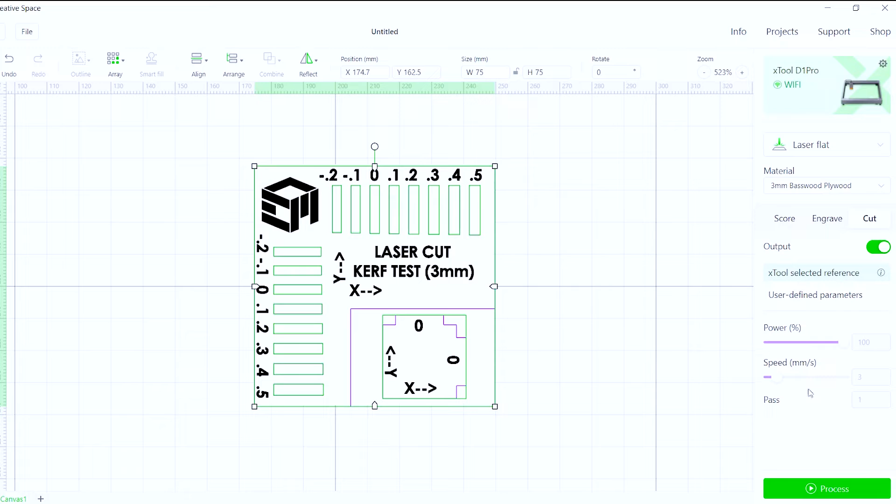Back on the left-hand side, I'm going to click the image button again, and I'm going to import a DXF file. And this type of file has objects or paths within it that the software can recognize for creating through cuts. I'm going to drag this down over top of my rasterized image, zoom in and make sure that I have everything aligned. And then over on the right-hand side, I'm going to set my properties for my through cuts. I'm just going to be using the 3mm basswood plywood presets again in the cutting tab, and then I'm going to click the process button.

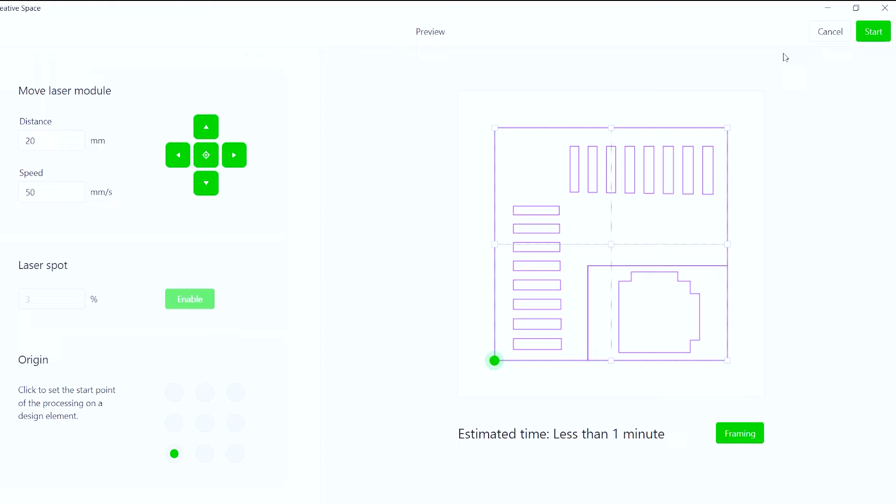In the preview screen, you'll see that just the through cut pattern is now displayed, and that's because I disabled the output of the engraving job, and then I can just hit framing again. Since I haven't moved the tool head or the workpiece since the last job finished, technically I really don't have to do this, but it is good practice. So I'm just going to skip over the part where I show you guys the framing, and I'm going to start the job now.

Earlier I mentioned that in this example here, I'm going to be making these cuts with the workpiece directly on top of the silicone mat with no air gap in between. And obviously this is not ideal, but I'm doing this just to demonstrate that the silicone mat that I was telling you guys about can survive this type of abuse and save the table underneath. I've also sped this video clip up 3 times, and so in reality the tool head is moving quite slow, but you would have to expect this.

Now the power setting is at 100%, but to cut through 3mm of wood, you're going to have to expose the wood to the laser for a longer period of time, hence the slower linear speed. With the through cuts, I would expect more smoke and fumes to be produced, especially considering the longer duration of time that the material is exposed to the laser. But again, with the extraction nozzle, I'm really not seeing any accumulation of smoke or fumes, so it's doing a very good job in this case as well. The cuts came out nice and clean despite not having the workpiece elevated off of the bottom mat.

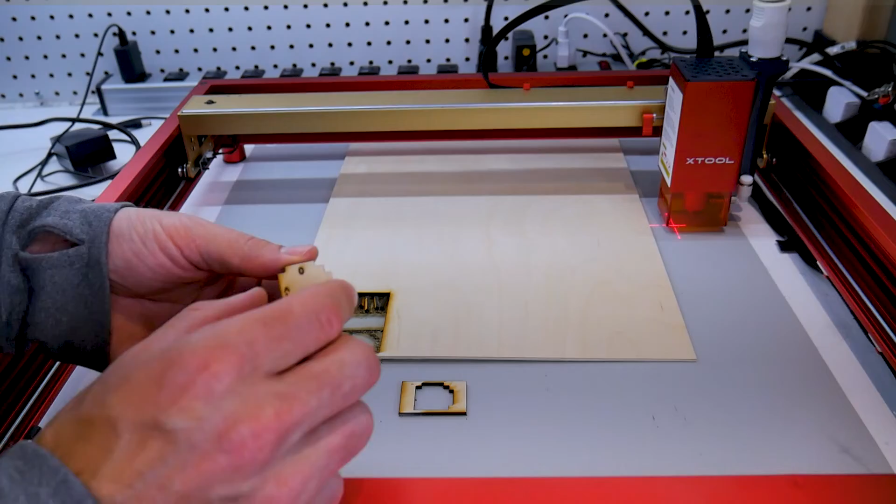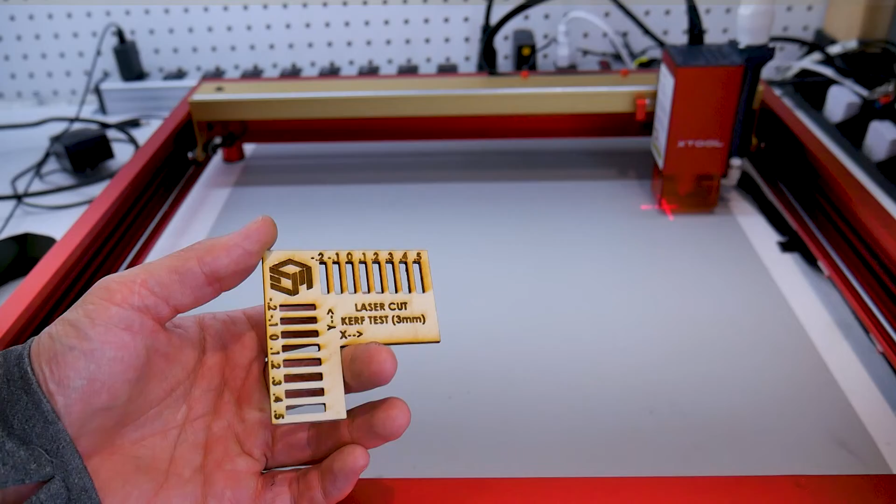And the purpose of this thing that I made here was originally to test the kerf of this laser cutter. The kerf is the width of the cut produced by the laser beam itself, and some laser modules produce beam patterns that are not perfectly circular or perfectly square. When making things like jointed boxes that use these tab and slot type features to join panels, this could have an effect on the fit between the tabs and the slots.

And so I've devised this sort of clearance test piece here where slots were cut in the X and Y direction, as well as a small little puzzle piece type feature here that has tabs on it cut in the X and Y direction.

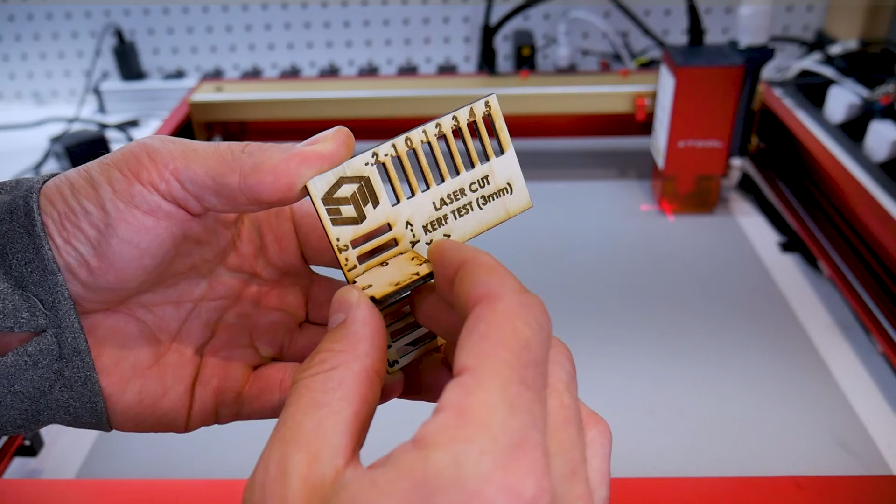And this is going to allow me to get a better gauge on how the fit between the tabs and the slots is. And you can see that there's a scale where incrementally I've changed the clearance on those slots, starting from 0, which would be size on size, and then increasing with 0.1 millimeters and decreasing by 0.1 millimeters. By testing the puzzle piece tab in each of the slots and flipping it over to test in both the X and Y direction, I can determine whether or not I need to make any compensations in any one particular

axis in my design. For the D1 Pro, I did not notice any difference in the X or Y direction, and the size on size setting seemed to work best. The negative 0.1 millimeter size was a very snug, slight interference fit, but I feel like when you start getting into bigger pieces with multiple tabs, you want just the tiniest amount of wiggle room to make sure that they all fit together. So I think I'm going to go size on size in the future.

After calling this thing a kerf test, I did come to the realization that it's truly not a kerf test unless you've already compensated for factors that would influence the clearance for these tabs and slots. Off the top of my head, I can think of 3 things, and the first one would be the thickness of the wood. In this case, it's advertised as 3 millimeters, and when I measured it with a caliper, it's pretty darn close to 3 millimeters, so hopefully that's not having much of an effect.

The second thing is the accuracy and repeatability of the motion system itself, and truthfully, I did not validate this in any way. Therefore, I'm trusting that it's reasonably accurate, at least within the realm of a tool at this price point. And the third and final thing that I can think of is how the software generates the toolpath. To my knowledge, xTool Creative Space cuts on the center of the lines within those files that you uploaded with the vector paths. If it was applying some sort of an offset and cutting inside or outside of those lines to compensate for the kerf, then of course that would also have an effect on the clearance and how you would need to design your clearances within the files that you're generating.

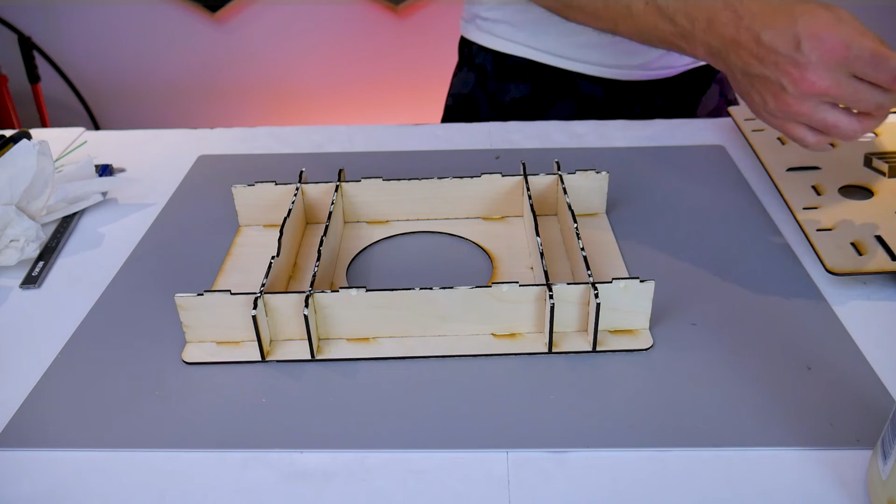I'll give you guys a sneak peek into a future video where I've used the D1 Pro to cut out all these parts in this more complicated assembly, and I had used the results from that clearance test to create the design files for all of these parts. I'm happy to say that the fit was absolutely perfect.

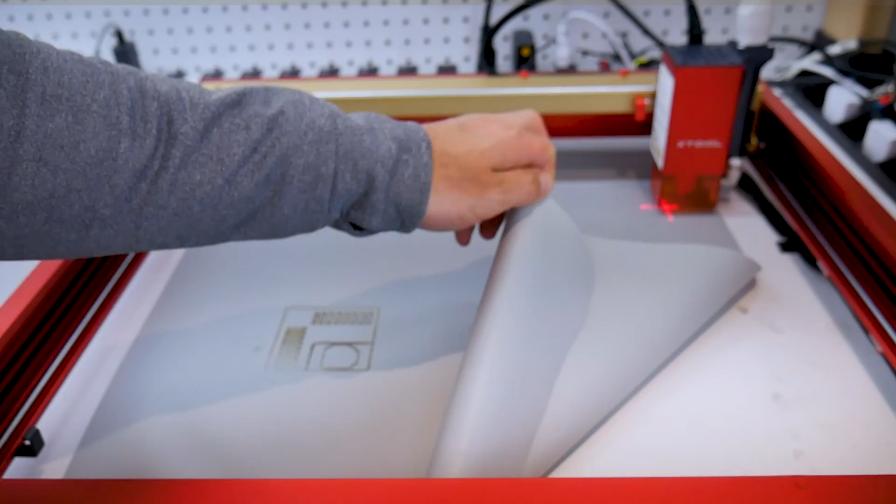And to wrap this video up, I do just want to show you guys that the silicone mat did in fact save my table, and it can be easily cleaned up with a wet cloth and a vacuum cleaner. And once clean, you can see that the laser did not penetrate the mat, and flipping the mat over, you can see the table underneath is completely unscathed.